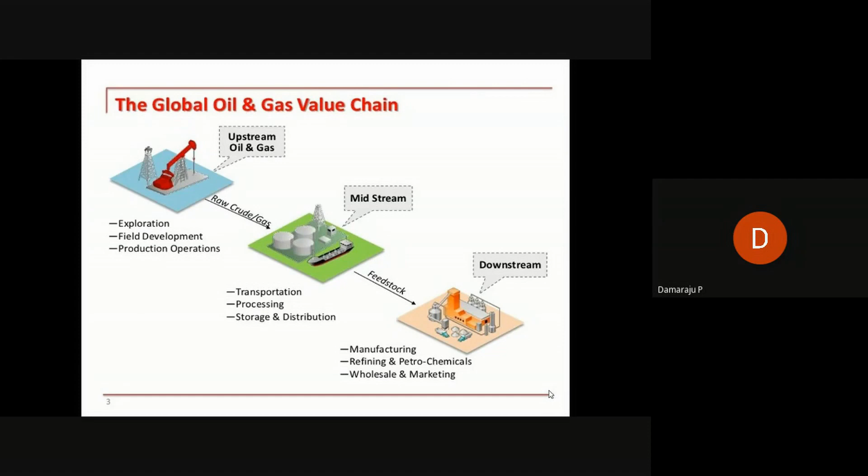That is the concept of upstream, midstream, and downstream, and we are from ONGC, and that is your upstream. That solely deals with oil and gas production, exploration, and exploitation. So you can call it production. I am going to talk about the E&P business of ONGC, basically keeping in mind ONGC oil and gas exploration and production. ONGC is an upstream industry where we find all kinds of activities of oil and gas.

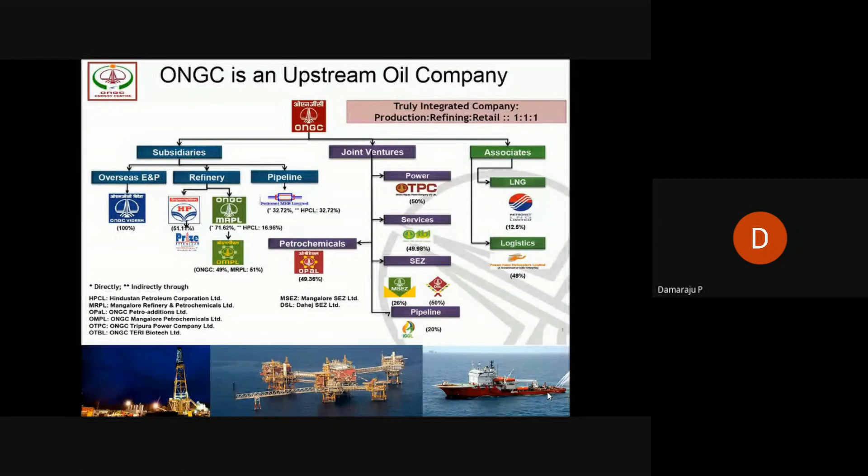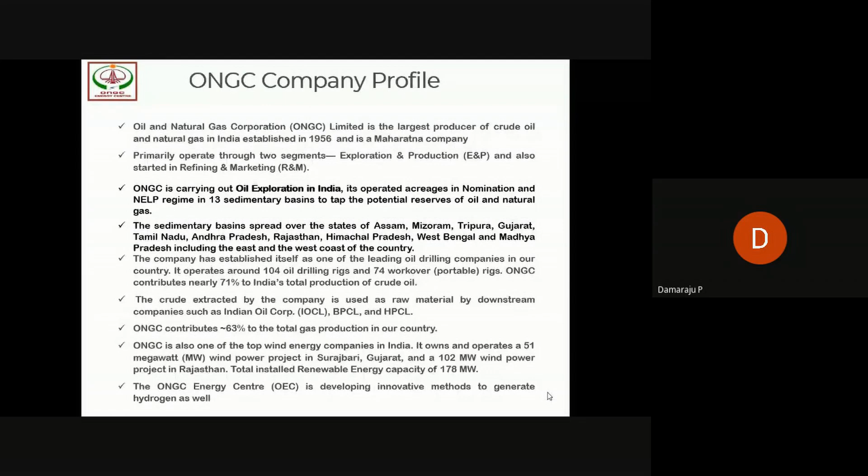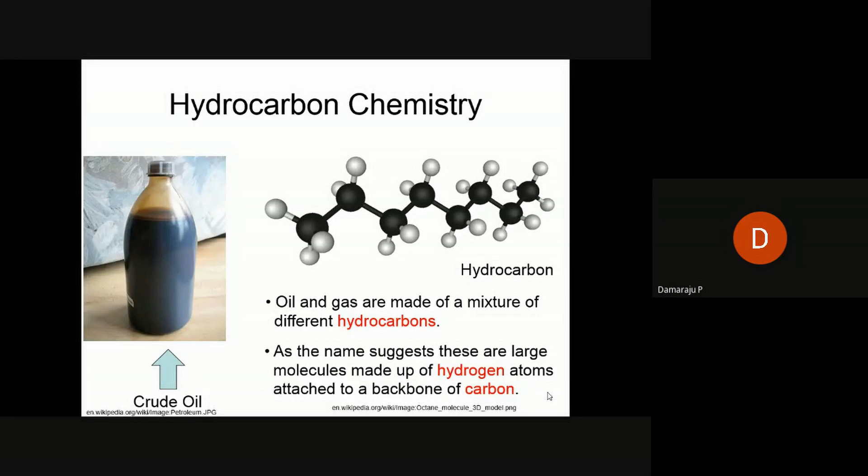As I said in the beginning, we'll start first with how oil is formed, then we will go to exploration, then development, then drilling, and then ultimately production, and then the other challenges we talk about. When we start talking about hydrocarbon, everybody knows this is made of carbon and hydrogen molecules only - larger molecules, very longer chains. And today, crude oil - it is really crude. Nobody knows what is there in that except some 20-30 products; nobody knows what the crude oil contents are even now. So this is made of hydrogen and carbon, and it is naturally synthesized.

So the origin of hydrocarbons - we call it oil and gas, we call it hydrocarbons - they are made of plant planktons or animal planktons. So they are debris, basically debris of pteridophytes, like certain kinds of plant materials, and then animal products.

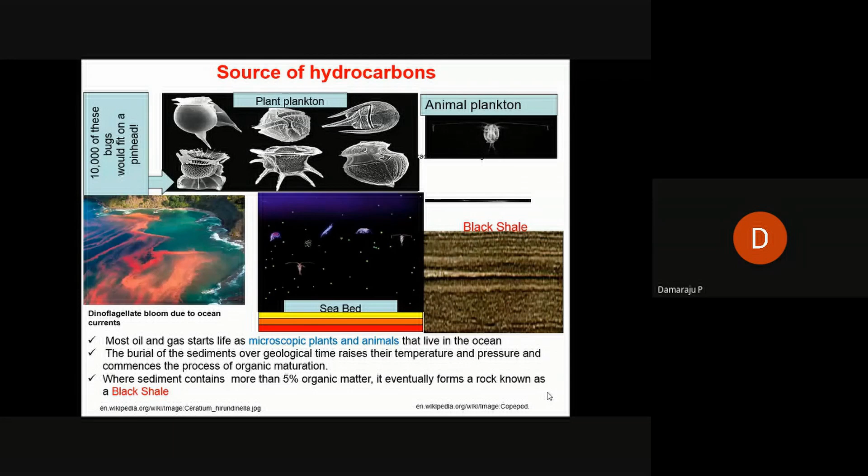And then they are all, over a period of time, millions of years ago, cooked properly. Cooked in the sense that they were submerged, just in the shallow oceans, and then ultimately they will be settling as sediments, and those sediments will become a thick shale like black shale. So that is called a seabed. They will be made as black shale.

It contains 5% of organic matter, and this is called black shale. The interesting thing about this oil and gas is it is not cooked for 1 or 2 years. 150 million years ago, the conditions were just right to make such synthesis, I should say, artificial or natural synthesis, automatically. Then these black shales are formed and piled up over a period of time, about 150 million years ago. That is Mesozoic times, in geological terms called the ancient era.

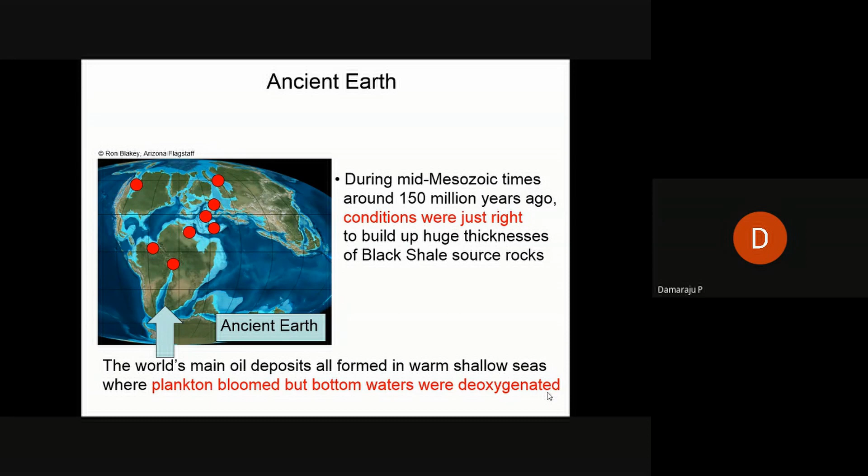So the world's main oil deposits are formed in shallow seas where plankton bloom but waters are deoxygenated. Normally offshore is the main thing. Offshore means seabed is the main thing. 60 to 70% of oil is produced offshore.

As you go down deep and deep, this black shale will be transforming into several kinds of products. This organic matter is first changed, with increasing temperature, around room temperature and going to 50 to 60 degrees centigrade, it is in kerogen form. Then it transforms further, going to 90 degrees centigrade, and at that temperature it turns to oil. That is called crude oil.

Then ultimately, when it is heated up further, automatically receiving more temperature, at 150 degrees centigrade it will be turning into gas. That is called natural gas.

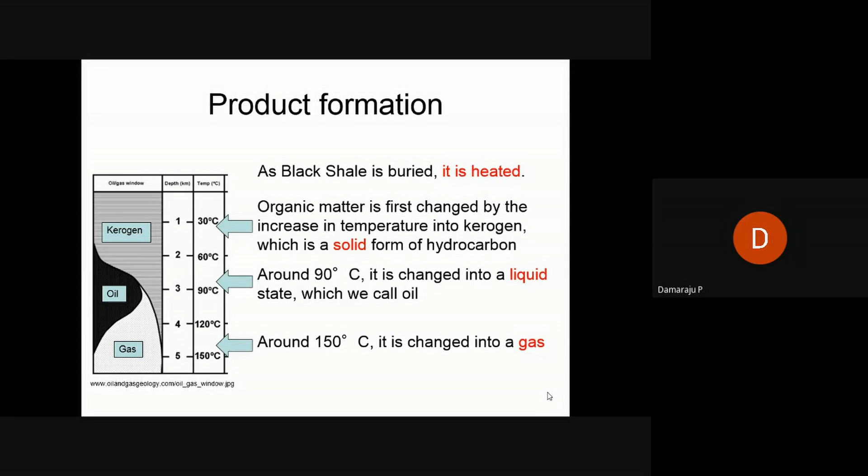Oil and gas will be less dense than water. Along with water, all three things will be existing in a particular rock beneath the surface. So that is called a reservoir. That is what we call it, the reservoir rock.

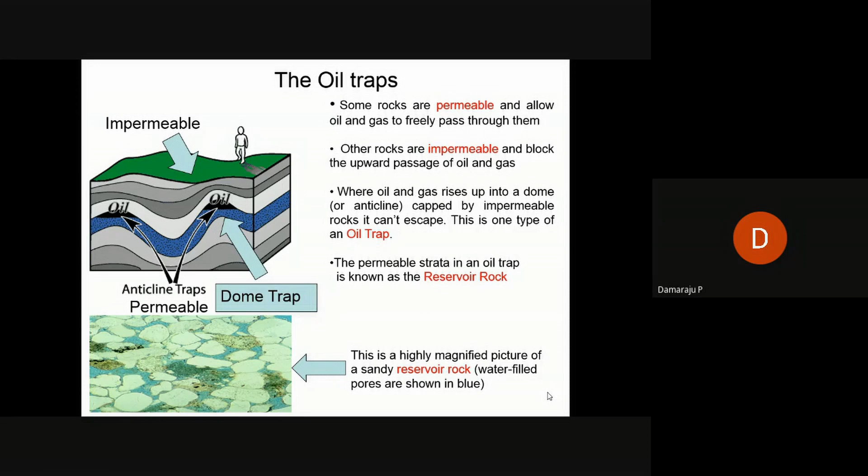So our thrust is to find out where to extract more and how much is there. When we talk about oil, gas, kerosene, black shale converting to kerosene and different types of products depending on the availability of different temperatures existing in the subsurface, they will be trapped in different types of rocks. That is called the source rock, where the pools are existing.

That source rock may be sandstone, normally largely sandstone, and it will be containing salt water and such. Normally you know, one third is only earth, two thirds is sea. So naturally, the water present in the subsurface will be mostly seawater, though it may be diluted with different types of stuff.

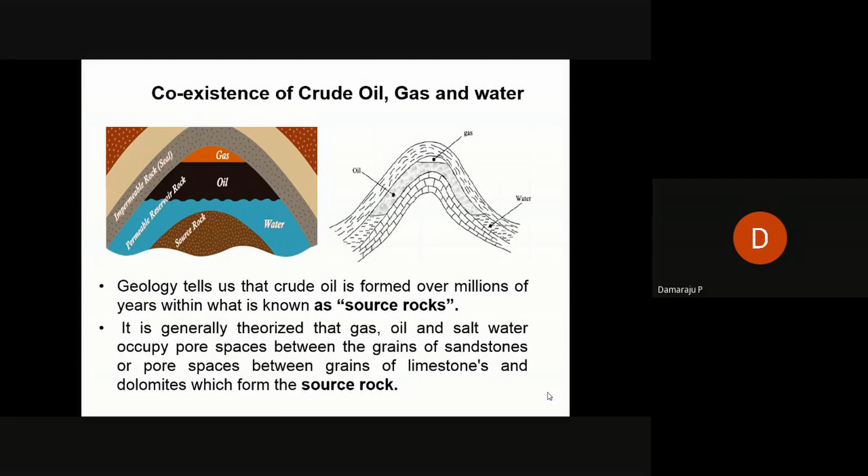So how to extract that? I know that it has migrated. I know that it is not in my hands.

Oil is produced somewhere, it migrates somewhere, and it is capped somewhere in an impermeable rock. Now my struggle is how to extract it.

So different types of campaigns will go ahead, exploratory campaigns. First, a geologist will be finding out different types of sources with different types of clues. He will study the rock characteristics, and he will know which kind of rock it is, whether it is sandstone or limestone, whether it has the capability to hold oil or not. All these initial studies are done by geological survey.

Then it will go to geophysical survey, which I will show in the next slide. It is done either onshore or offshore. Offshore means mid-sea, not on the shore. The geophysical survey is done to find out where the oil and gas pools exist, exactly where things are there.

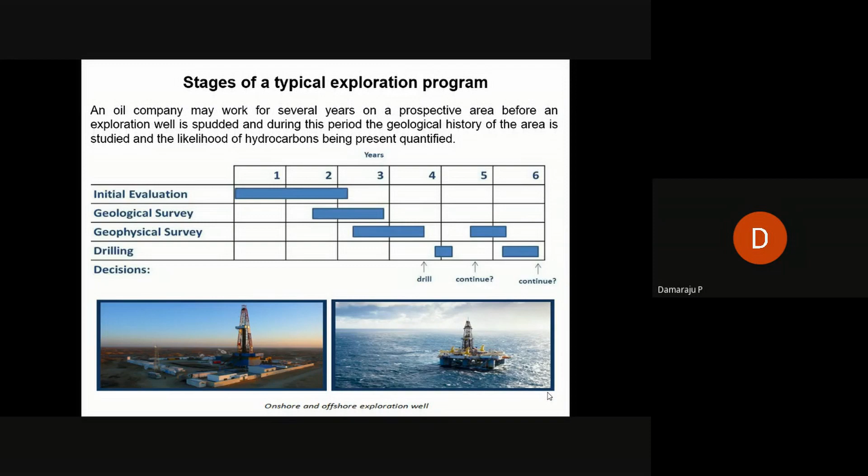Then drilling is done. All these activities taken together for drilling a well will take at least some 6 years. So by the time it comes to drilling, it is the fifth or sixth year. The initial 4 years will take these geophysical and geological surveys, re-establishing the things and then quantifying the figures, how much is there and all.

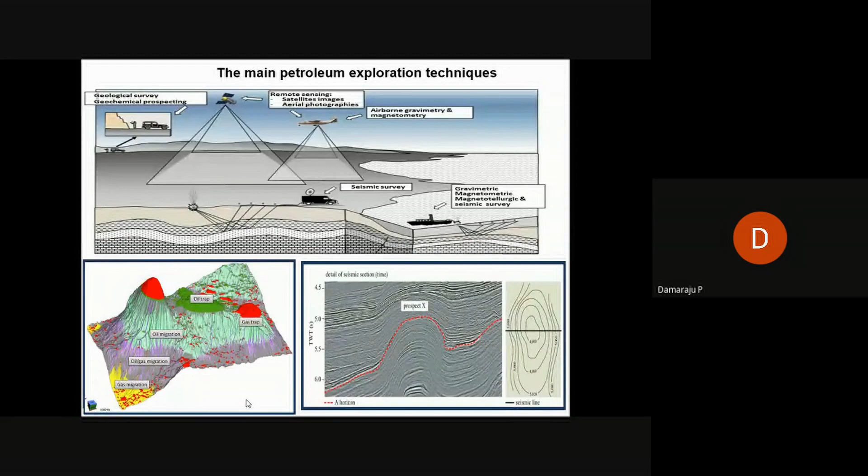So there you will pinpoint it from the seismic survey, then you will start going for oil exploration. This is the area where I want to drill. So this is the exploratory campaign seismic survey.

Different types of vessels will be used, and they will be detonating some kind of explosions, whether on land or offshore. There are devices called geophones, and that geophone will be recording the sound waves. Based on the sound wave, it will tell where the oil and gas pools exist.

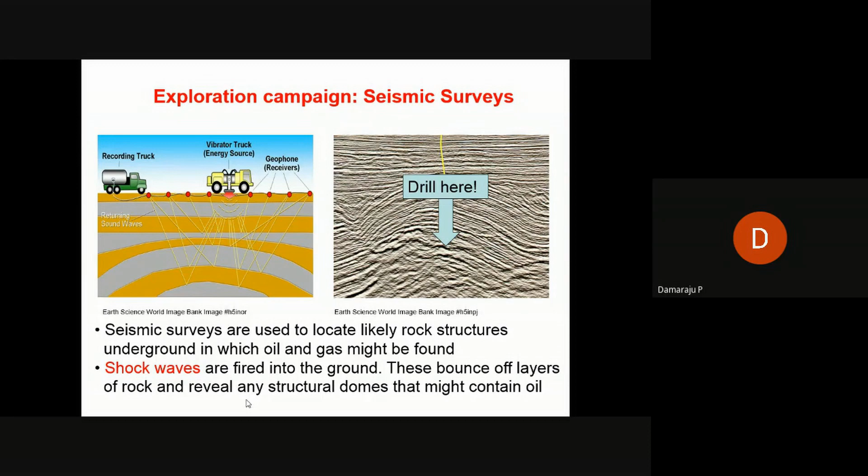Once it is pinpointed, then I will be drilling. Okay, this is my point. The right side of my slide will indicate drill here, this is the area where I have to drill. So after exploration and production, then I go for drilling. I know this is the pool where oil and gas prognosticated estimations will be taking place, so I'll say this is the area of my interest. So I'll drill a well.

This is a typical offshore rig. The cost of drilling, you can understand, becomes very costly. So 30% of the well cost is for drilling only. Each well onshore, at least shallow wells up to 1,000 meters, will take at least 1 to 2 crores. You can imagine the kind of steel and other things which are used.

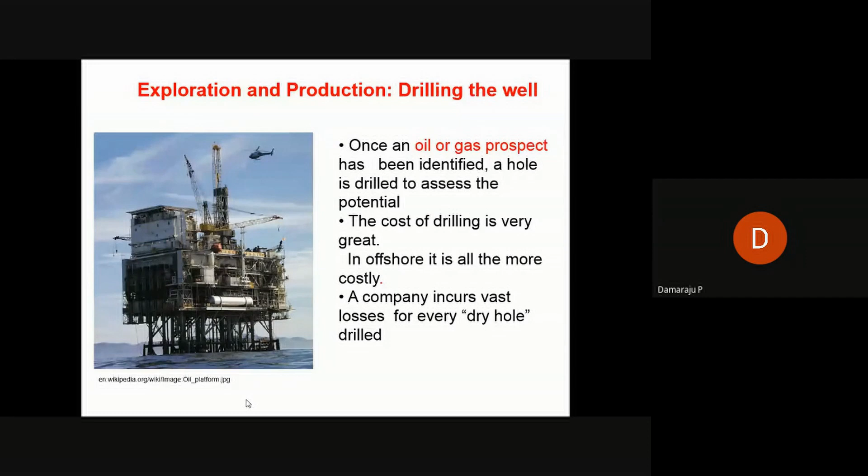If five wells are drilled and some 3 wells are producing oil and gas, then it will be economical. Fortunately, we got a very good success rate in ONGC. That's how we are surviving in Mumbai and all.

In the exploration production campaign, once the oil and gas well is drilled, it will flow on its own. Once oil and gas are produced for a long time, only up to 20 to 30% can be recovered by self flow. After some time, self flow will cease. Then you will use some kind of artificial lift systems, like sucker rod pumps as we call it. Otherwise, sometimes we use steam injection, carbon dioxide injection, or water injection to pressurize the reservoir and then produce again.

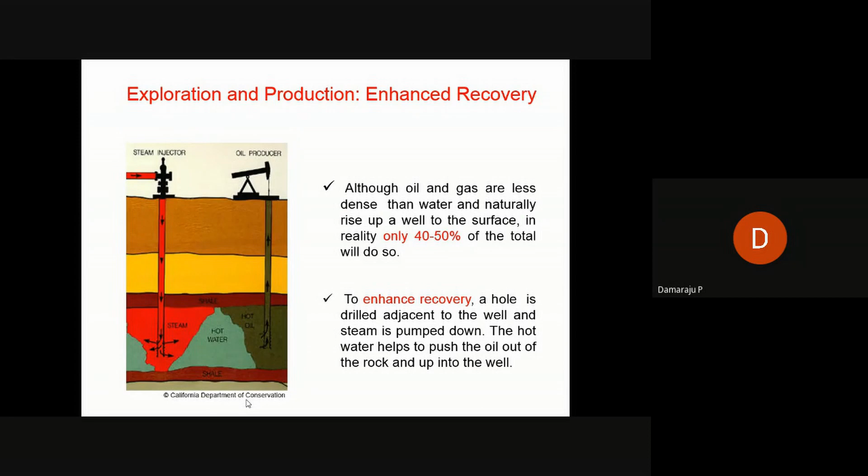In spite of 575 sedimentary basins being there, only 215 are productive. In our case also the same thing applies. We produce around 80% of India's production levels now in ONGC. So 90% of oil and gas comes from 10% of these basins. That's what I was explaining.

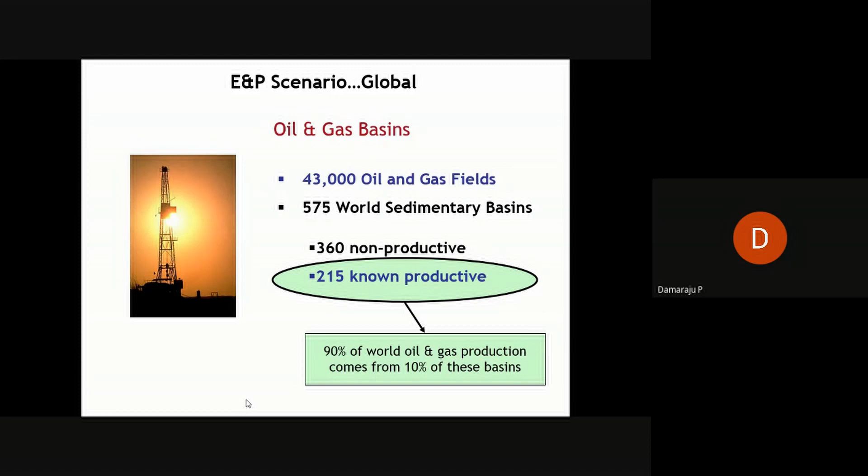So this is the scenario. World over, more than two centuries this oil and gas business has been going on. Even then, Antarctica and Arctic regions remain unexplored. These regions are still to be explored. All over the world it is present in all kinds of areas, and in certain areas it is more, and in certain areas less.

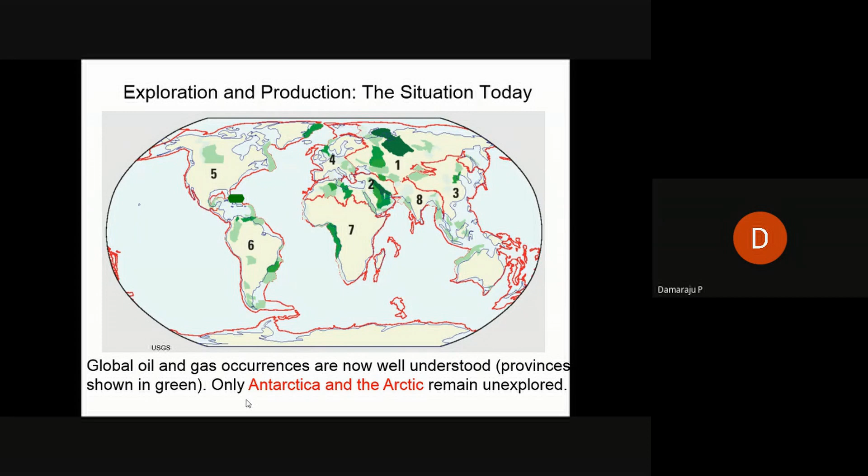You can imagine by now why certain areas are rich and certain areas are less. As I said in the beginning, the way it is formed and trapped and ultimately produced, naturally some areas will be rich and some less. So once oil and gas pools or reservoirs are identified, I can drill wells and comfortably develop the area to produce large quantities of oil and gas.

So the next step is how to produce. Obviously, any process has to meet its end user. Why am I producing it? I have to sell it to my refinery. So will the refinery accept my crude oil or gas? What are my midstream and downstream requirements? There will be some quality requirements.

I have to ensure that when transporting the products, there should be no corrosion issues, scaling issues—calcium carbonate, calcium sulfate, or mixed scales—even microbiological menace, safety and environment concerns. From Mumbai High to Uran, around 205 kilometers of subsea pipeline is laid out. So I have to consider all these aspects before treating the oil and gas.

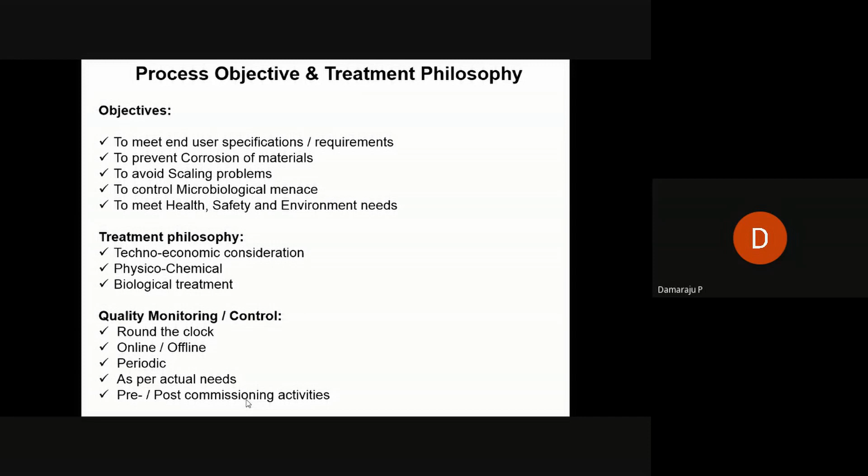So the treatment philosophy depends on whether it is techno-economically feasible, whether I can produce whatever I am producing—it's not that I'm producing it in platinum and gold. It should be producible and ultimately saleable. There's quality monitoring around the clock. That's why investments are high in this kind of business—only public sector giants use this, it's not everybody's cup of tea. This is a simple schematic.

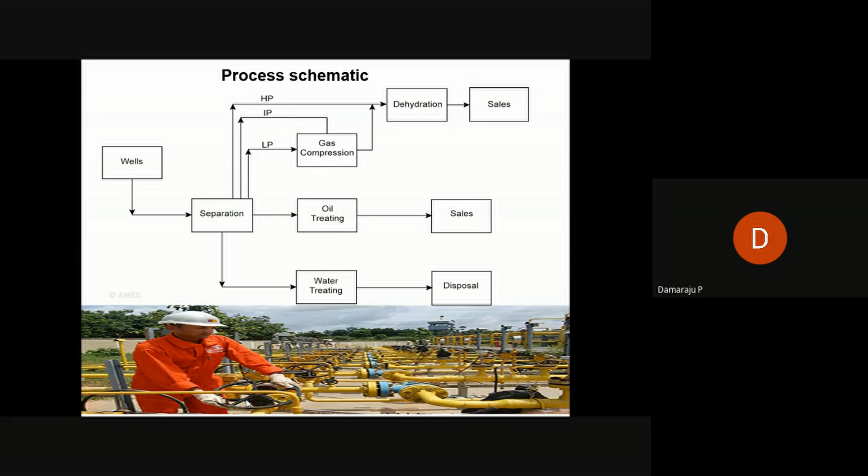What we do is drill different types of wells, clusters of wells, and they are separated—oil, gas and water are separated in high pressure or low pressure separators. Gas is compressed, distributed, and dehydrated, and oil is treated—meaning removing basic sediments and water. The water cannot be thrown out as is; it has to meet environmental norms before disposal. This is a schematic of this process.

So what is the philosophy of this entire oil and gas process? It's simple logic—a physico-chemical treatment. It's not very complicated as such, but it appears simple while actually being very complicated because of the nature of the products. Oil is not a simple product—you do not know what it truly is.

It is a mixture of several hundreds of products, and it is a three-phase phenomena. Oil, gas, and water will be there. So some emulsions and all things will be there in that. So you will be doing gravity separation. That is the best thing. That's what we do.

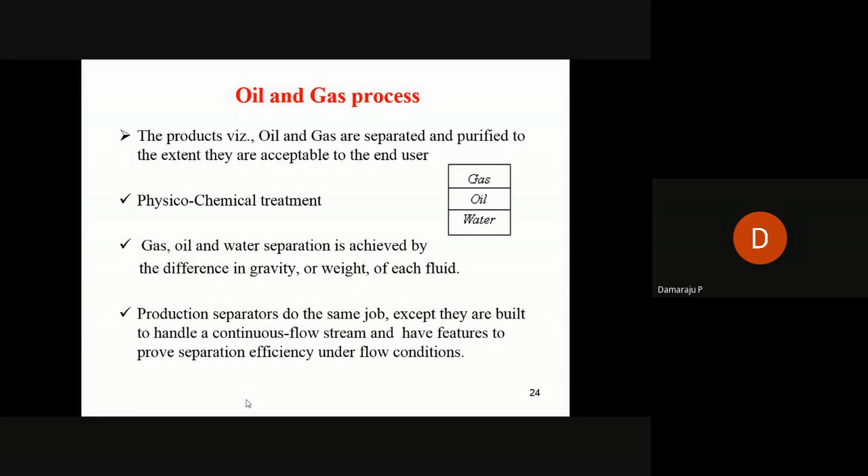When I start talking about this under certain kinds of flow, temperature and pressure conditions, how to separate it in an economical way - that is my main concern in the process. You see that the separator is the heart of the entire oil and gas process.

You will be using this in engineering actually. You will be doing a horizontal separator or a vertical separator depending on the type of fluids and type of gas that is existing. There are different types of concepts, design criteria, flow conditions, and several other things. And then spherical separators are also there.

Largely these spherical separators are used for LPG and all, where vapor pressure is more and large gas with minimum liquid is there. That kind of thing is mainly used for NGL and all. And then vertical separators are used where there is low gas pressure.

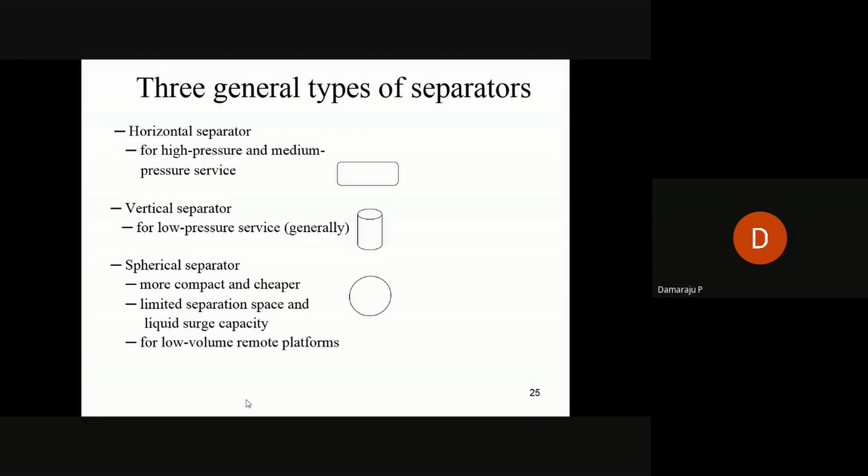Normally most of the places will be using three-phase separators because that is economical, cost effective. In the initial stages, even in Ankleshwar field and all, we used to use these vertical separators. Vertical separators are easy to clean and have several properties.

Why and how these things are used is when the flow comes, it is said that large gas space is required in this kind of vertical separator, large separator diameter - several advantages are there and several disadvantages are also there. You can go through those disadvantages, but largely we are using mostly nowadays horizontal separators only.

The fluid you can see in the right side of my slide - you will find that the liquid will be separating in the middle, that blue shade given containing some kind of droplets like oil droplets. It will give some interface, there will be a control valve which will fix, and once it reaches a certain level, it will automatically flush out. In the bottom, just below, that will be your water, because of gravity separation. I said the top will be gas, so a mist separator and several things are there.

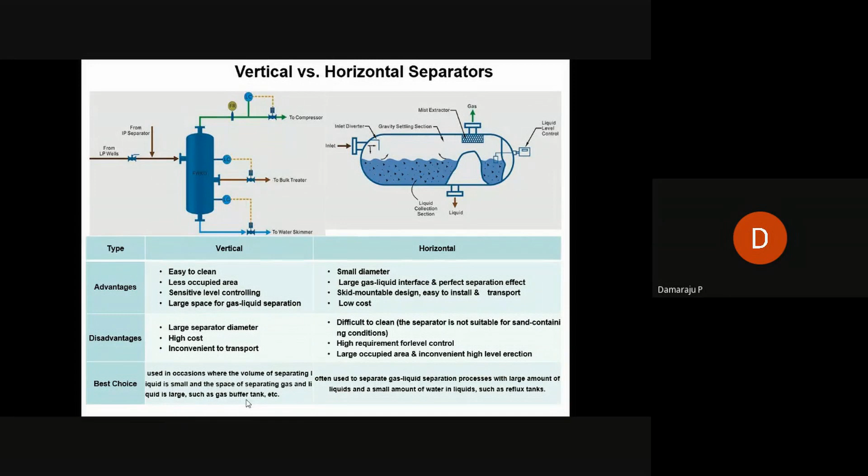So how this oil, gas and water will be separated, in the next slide I will be telling about. This is a design of the separator.

Normally when you find different types of production separators, you call a production separator a test separator. It is at the wellhead. You want to know what is the flow and whether oil and gas, water and all - how much is my flow rate, whether it is economical to produce or not. Production separator means in the process centralized platform where several wells are connected, and it will be producing oil, gas and water, further going to pipeline and all.

That is called several kinds of things in offshore - it is called a process platform like BHN, BHS, like that. In onshore, you call it CTF, central tank farm.

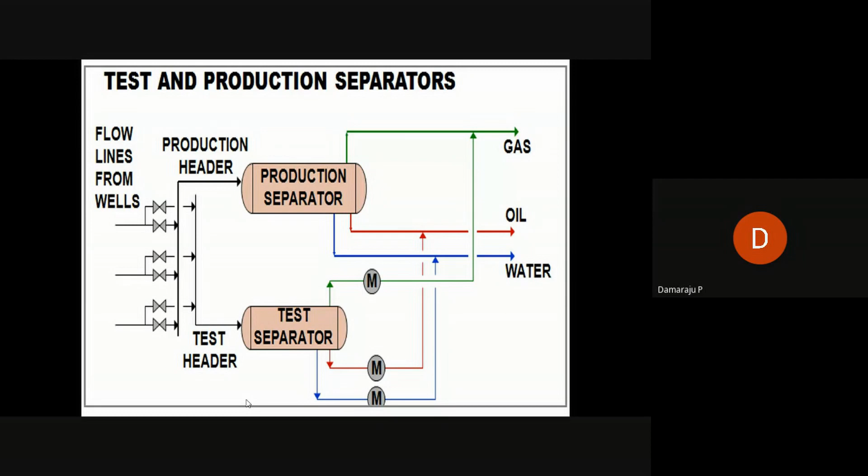This is only just we have to see. Obviously, my objective is to separate more and more rich products. So high pressure gas, high intermediate pressure gas, mid pressure or intermediate pressure gas, and low pressure gas - like that, actually 3 stages it will be separated, just like solvent extraction. You cannot do it in a single stage. So you have to recover more and more useful products.

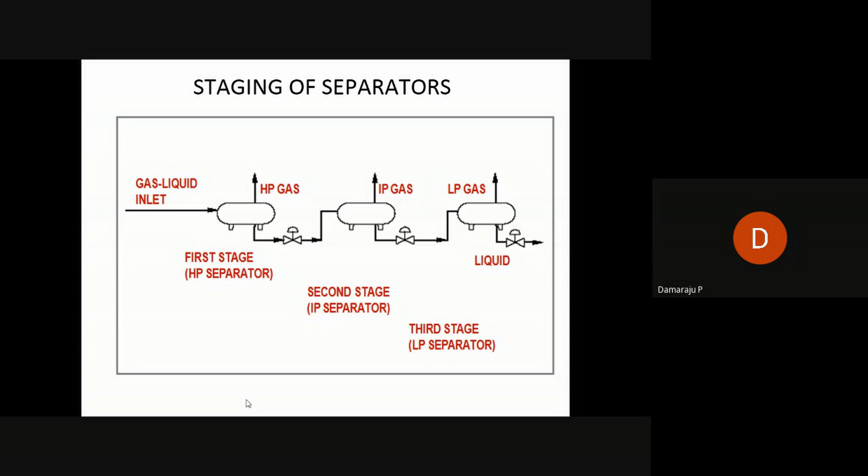High pressure gas will be the ultimate thing that will be rich with methane only - lighter components. Low pressure gas you cannot compress or anything, though nowadays you have some facilities; it is normally flared, like earlier it used to be flared. Mid pressure gas is rich with products useful for LPG and all. So oil and water - when I'm talking, you don't get pure oil, you don't get pure gas, you don't get pure water like.

So I said in the beginning itself, physicochemical separations, that chemical component plays a major role where water and oil are immiscible. Of course that is there physically, but when you are cooking at very high temperatures and high pressures, they form tough emulsions depending on the type of oil that you have. So it is very difficult to separate them under normal conditions.

So you have to add some kind of demulsifying agents and certain kinds of things, like natural products which are minerals and all, which are existing. They will be making tough emulsion. That emulsion needs to be broken into oil and water. That's my treatment philosophy.

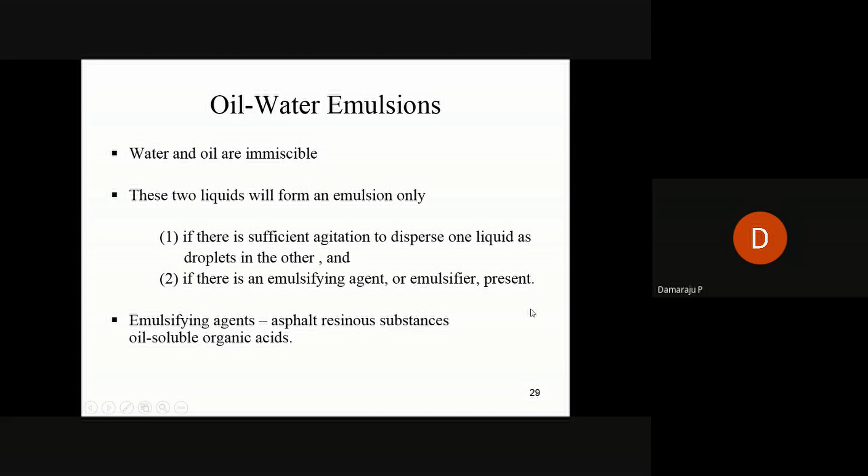Normally when we start talking about this kind of treatments, then only single treatment or single type of process will not be working. So what we do is I want to remove water. Water is a non-combustible material and it is of no value to me. But then how much water can I remove? That is my strategy to be done.

Treatment of free water is that free water will be knocked out, as I showed in the separators, in continuous process. Then I apply some heat, around 60 to 80 degrees depending on the type of emulsion. And then I'll be adding some kind of chemicals, surface active agents like demulsifier.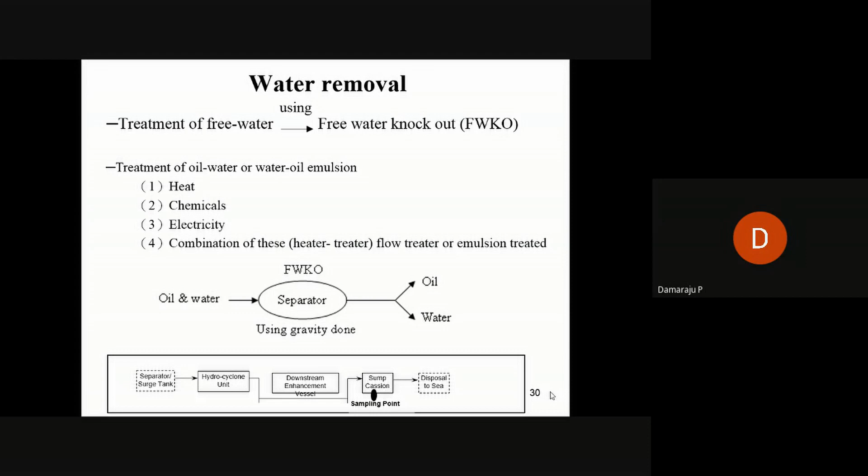This water, once it is separated out, will be going through several stages. Once again oil will be recovered, and then pure oil - pure meaning less than 0.1%, 1% oil and gas. Oil will be taken out and ultimately taken into further process for settling and all. It is only settling. You will just be breaking the emulsion in the separators.

Just let me tell you briefly about crude oil. Having said about different types of oil, gas, and water process, then what is crude oil, what is gas, what is water? Then we'll be finishing the entire story, because then you will be appreciating the type of thing. You can see that crude oil, as I told in the beginning itself, is a very complex mixture.

One barrel means around an American barrel, it's around 158 to 160 liters. So that barrel contains several useful products. Till now we have separated some of these things, like the gasoline, and you will be separating your fuel oil. These are all heavier cuts - jet fuel, petroleum, petrol, diesel, aviation fuels and all. So this is the composition of your gasoline or your fuel.

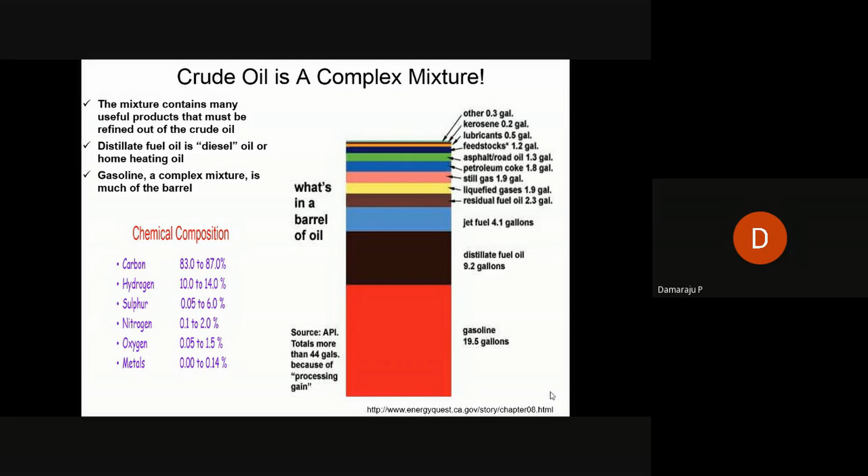Carbon is 80 to 90%, hydrogen 10%, and all remaining things are like that. That is, the carbon to hydrogen ratio is very high - that's how this is very heavy. When the carbon to hydrogen ratio is less, then it will be lighter oil or even lighter gas, like ultimately methane will be 1 to 4.

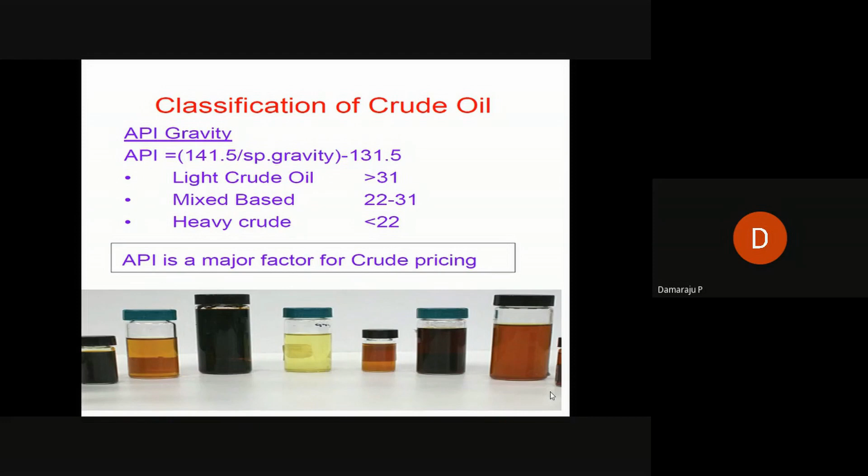So normally this entire oil trading is done based on API gravity. API means - you cannot see it, it is density only, but one cannot say density will be the factor, so you cannot remember the density. So there's a formula for this, and different types of oil you will see the colors, and these colors will tell you about what kind of light oil or condensate - very light - versus rich oil which will be dark.

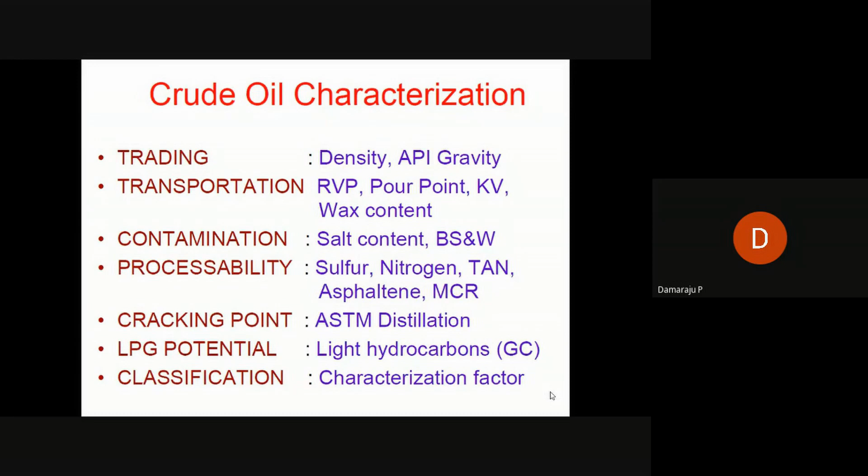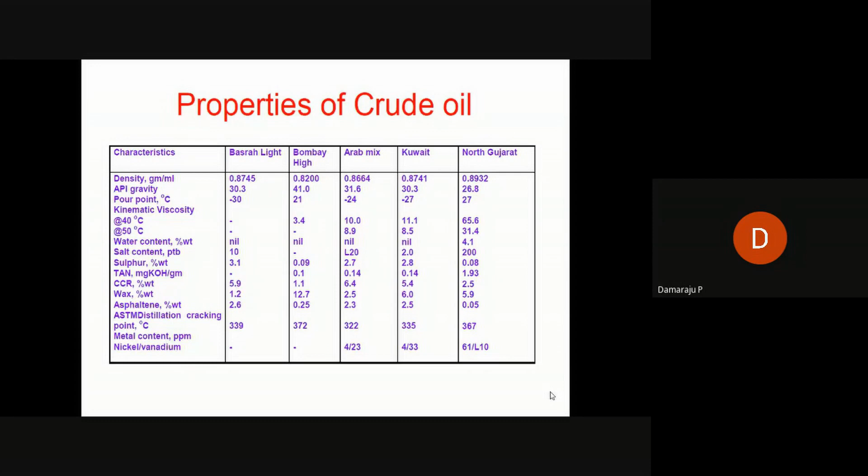It is comparable with world over crudes, like it is lighter oil. So that is what I wanted to tell. I am rushing because these slides are available with you, you can as well go through that.

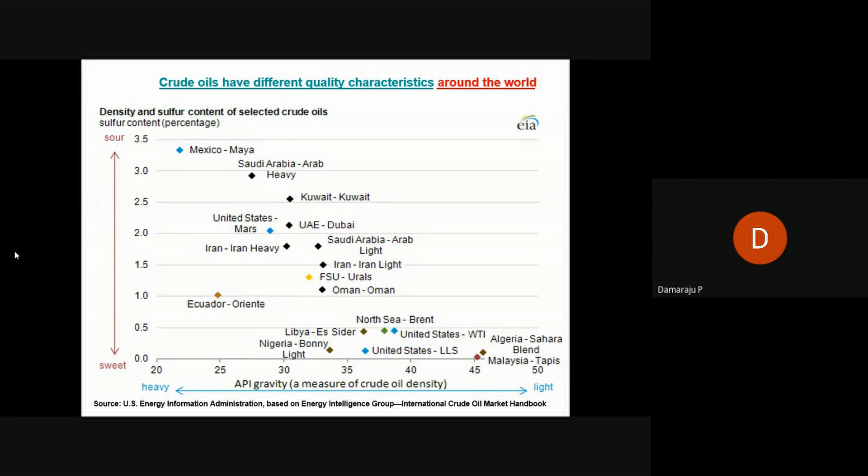When you see that there are sour oils and sweet oils: sweet oil means 0.5% sulfur content will be there, and more than 0.5% is sour oil. So far you have been producing sweet oils, that is good, and you are all over the world. Now you will be going more and more towards sour oils, so refining and all will be difficult.

Let me tell you about gas processing. What is natural gas? Natural gas contains several kinds of mixtures - C1, C2, C3, methane, ethane, propane, butane, and all kinds of things. Earlier, initially, we were not bothered about all these separations. We were just flaring everything and giving it to power generation.

But nowadays we are extracting everything. That is the reason I am telling that it is rich with 70 to 90% methane, but the remaining 10% is value-added products like C2, C3 and all - ethane, propane and all these things are separated by ONGC now, and that is what is marketed even by gas companies, GAIL also.

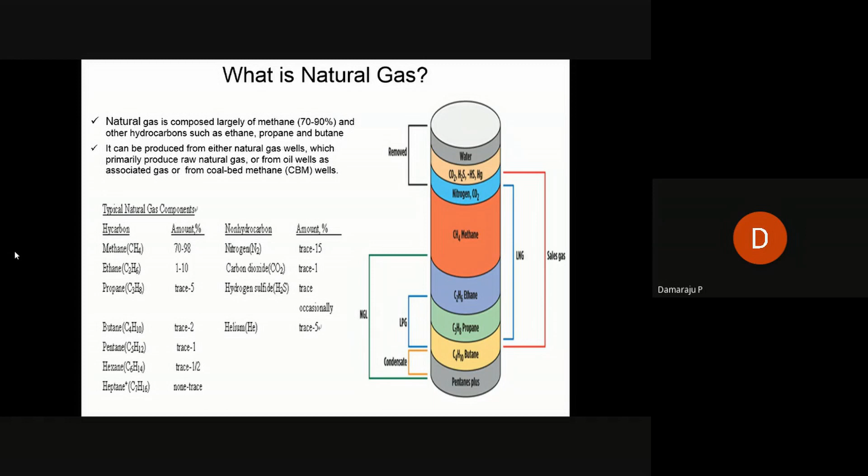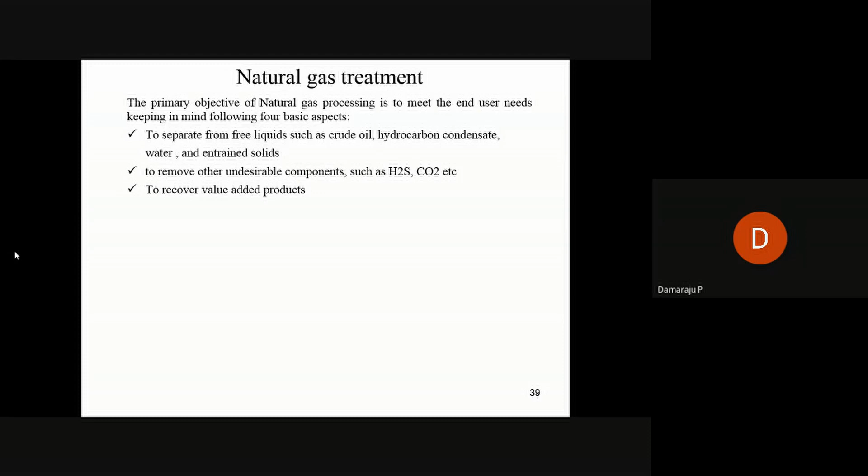So natural gas treatment - the treatment philosophy is how to remove your hydrogen sulfide, CO2, and then water. You don't add any kind of other treatments, just settling, molecular sieves and dry molecular sieves, and then this is passed through some amine solvents so that H2S and all will be removed, and this water will be completely dehydrated with some molecular sieves or even TEG, triethylene glycol.

7 pounds of water in 1 million standard cubic feet - that is the requirement for transportation in the pipeline. So different types of stages are involved, in how to remove different types of products. You can go through that; because of time constraint I am not going deep into this.

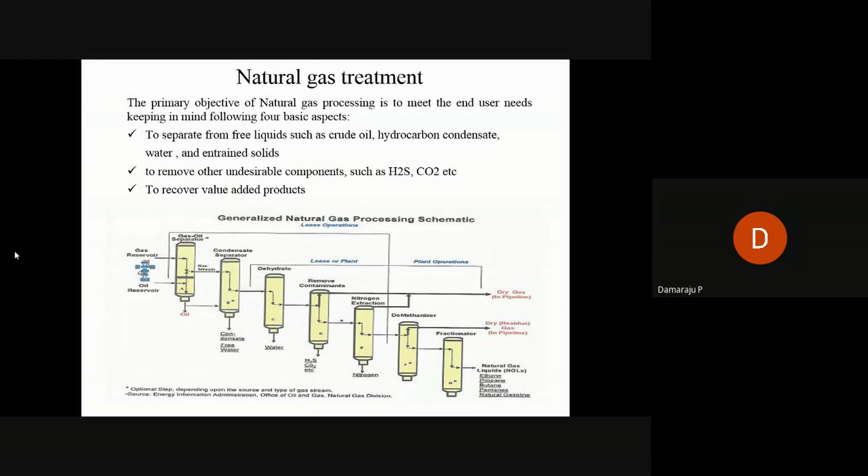As I said in the beginning, the previous slide, you can remove several products in this. So that's how this is the kind of thing - how to remove contaminants, how to make use of gas in a better way for value additions. So this is the treatment phenomena - already I said about absorption and adsorption and all these things.

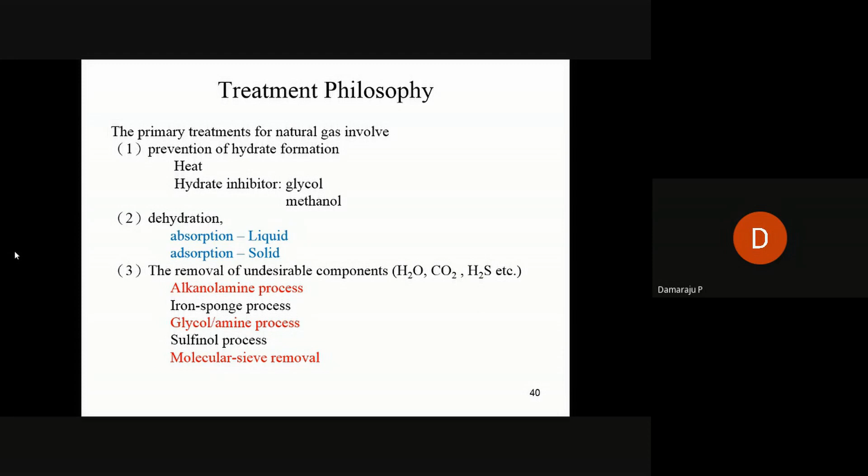So some minimum heat is applied, some 40 to 50 degrees centigrade, to prevent hydrate formation. You will be adding some kind of thermodynamic inhibitors like glycol or methanol during transportation. So gas hydrates is a major challenge - not in our case, but many places world over, actually, where the temperatures are very low.

The last but not least is produced water. In produced water - oil, gas, and water, when they are produced, water is an unwanted element. This water contains a lot of oil, non-soluble oil and organic matters like phenolics, dissolved solids, all kinds of corrosion products, or even natural clay minerals, and all these products need to be removed. Sometimes they contain geological material - they call it NORM, naturally occurring radioactive materials.

So you cannot simply dispose of them as you please. You have to follow some kind of regulatory norm. Some 40 ppm is the oil content that is allowed to be disposed of offshore, so onshore it is 10 ppm, with the remainder to be contained in different types of trace elements.

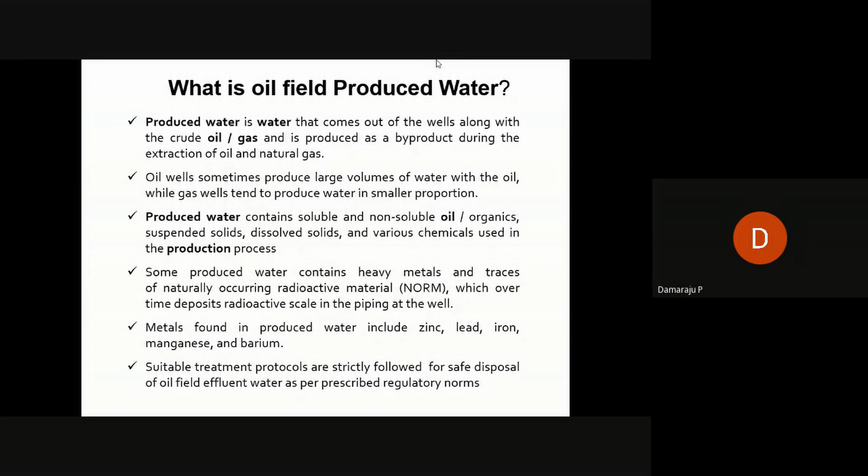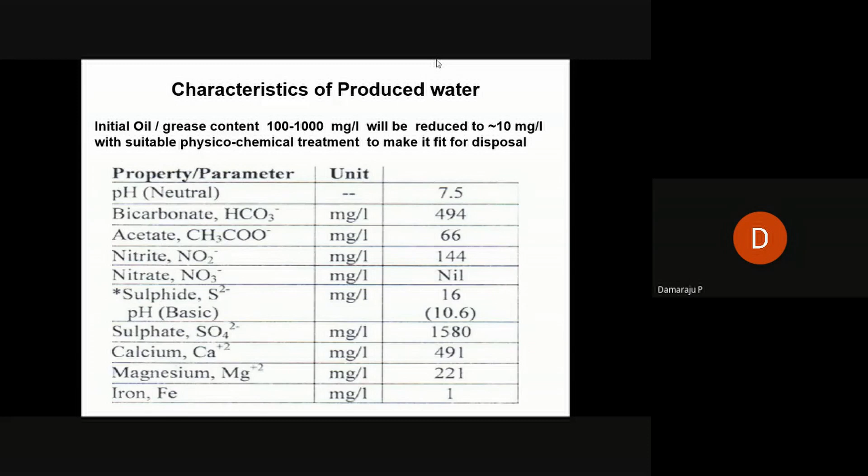You will find this is typical - salinities will be very high, and salinity is the major thing, and the remainder are your calcium, magnesium, and all. That's why the scaling tendency is more for this produced water. So you have to see that when treating this entire water, proper precautions need to be taken for disposal also, because everything will be choked otherwise.

So when I start talking about latest developments, I know that survival of the fittest is the best thing for even ONGC also.

When I am not able to produce more and more, then I have to go for unconventional sources of energy, like shale gas and gas hydrates. Those white patches you find in the globe, ice-like, that is gas hydrates. You have very good rich resources of gas reserves in gas hydrates, and exploration work is going on.

Then coal bed methane, in Jharia and Raniganj and all these areas, we are already doing some kind of work in that, either microbiological production and all. These things are going on all over the world, and even ONGC has started this for the past 10 years or so. It has been going on vigorously, and it is giving very good results now.

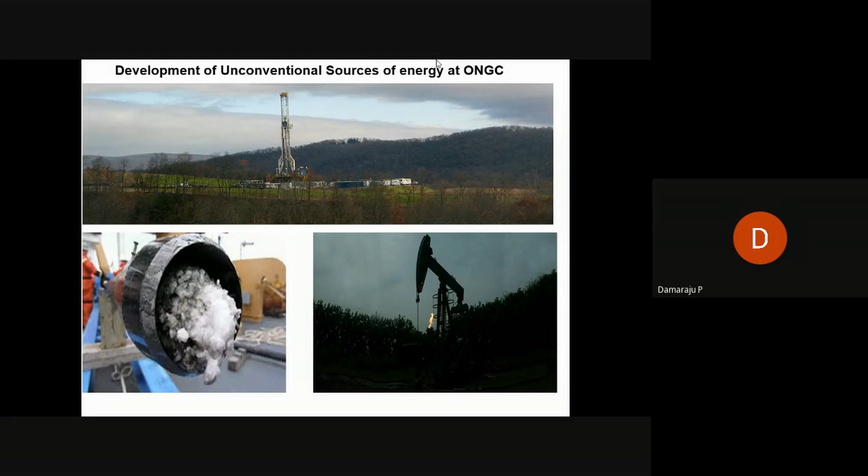You can see the Alberta tar sands, they are producing. We don't have that kind of quantities, but these tar sands in Alberta are producing very huge quantities of oil and gas. Half of the world's proven oil reserves exist in Canada's tar sands. That is what I am telling, that even for 20-30 years you have a lot of resources for this, but they are confined to certain areas only.

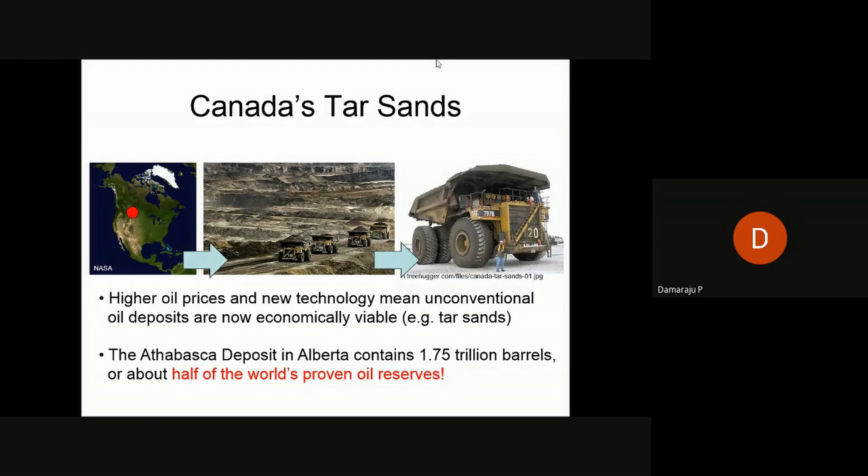So that is why they are not self-flowing like conventional sources. They are called unconventional oil deposits - shale oil, shale gas, all these things. You have to make a struggle for producing those things, and it's very costly.

So the technologies are also developing very rich, like artificial intelligence and augmented reality. Earlier we were drilling the well and then finding out what is there, but now you can visualize everything. A virtual reservoir can be seen at the desktop, and from the computer you can find out what is going on, pinpointing the source and the problems.

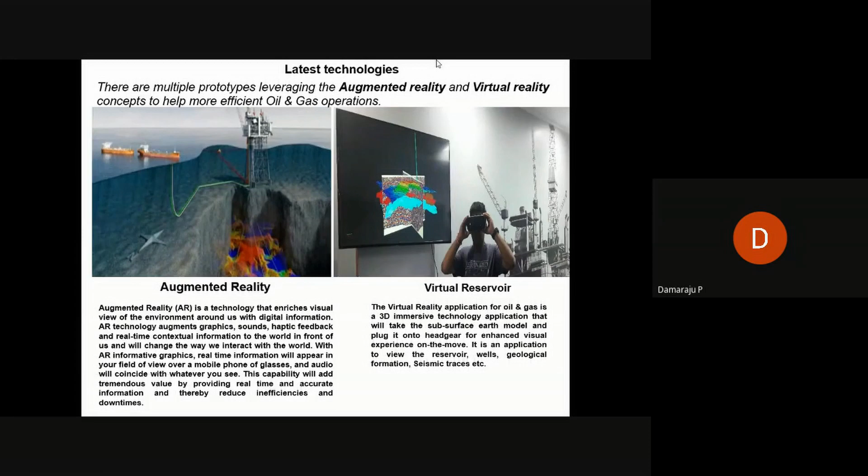Then it is done, and the efficiency of operations with digitalization and all has improved a lot, and ONGC has also introduced all kinds of things like that. The cost of operations also goes down, but simultaneously the recovery is improving nowadays.

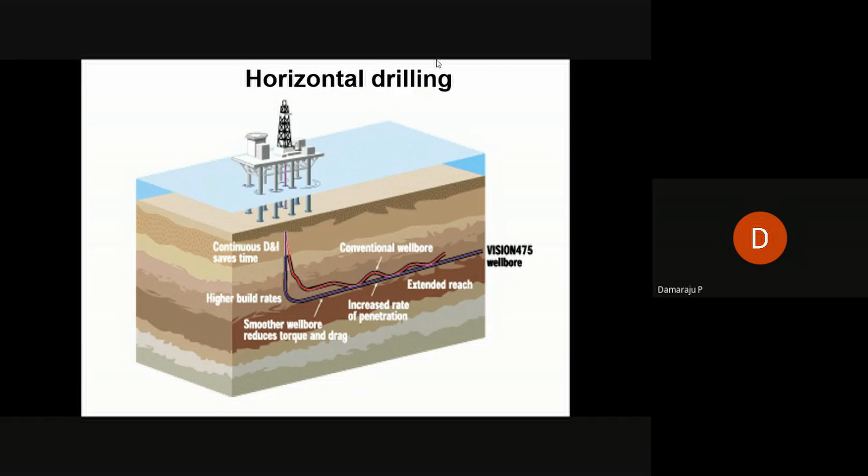So this is advanced visualization. This is one concept which was introduced in the mid-90s: horizontal drilling. Earlier we used to have a straight hole. A horizontal well will be able to sweep a lot of area nearby, and you will be producing more and more. Phenomenal production came up in ONGC history in the mid-90s when production levels increased with the horizontal drilling technique. This concept yielded very good results.

So with all these things, as I said earlier, ONGC has gone into several kinds of initiatives like underground coal gasification, gas hydrates, coal bed methane. Recently, I am working in ONGC Energy Center. We have started green hydrogen development technologies like hydrogen and all. So we are providing energy, whatever is best possible from the ONGC side, and we are doing this from upstream. We want to maintain our strategy.

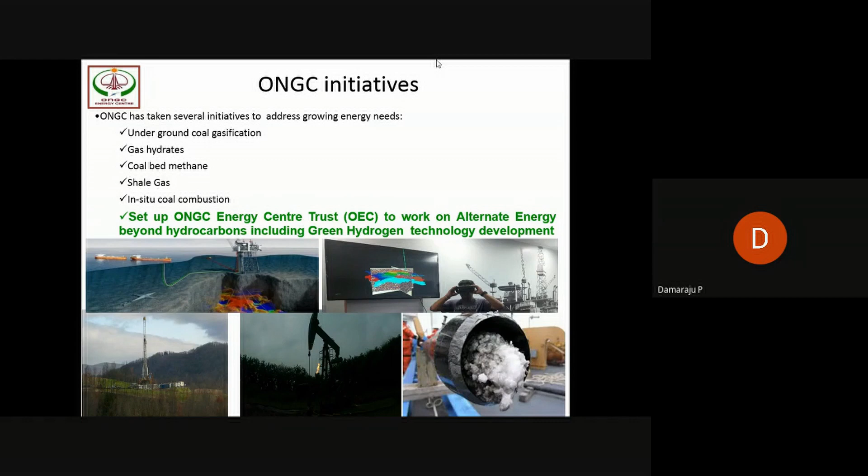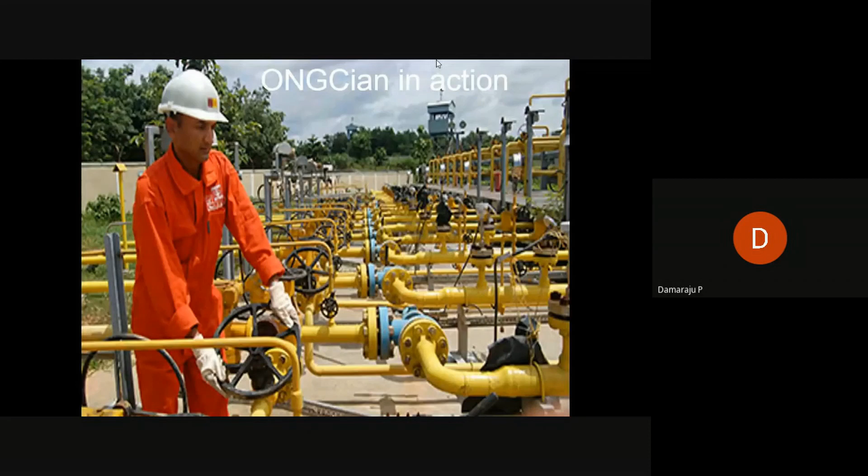So this is a GGS, where group gathering station - one of our colleagues is working there. That is how the entire operation runs, with safety operations and all precautions taken with all the safety equipment. In spite of the best measures, there will be some kind of problem, but even then, safety is given a lot of thrust in ONGC operations, not only ONGC but upstream operations in general. So this is the end of my talk.

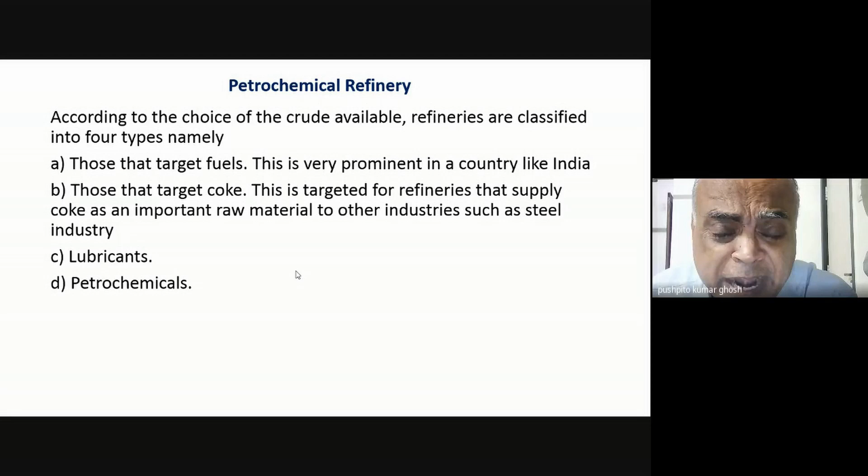Many times, the crude oil you get out will have an emulsion, and you need to break that emulsion. The people in the upstream may not be doing a perfect job of it. So one of the most important operations in a refinery is crude oil desalting. In the process, you have to remove the water and remove the salt, not just the water. Removing the salt means you need to break up that emulsion, and you may have to add some emulsion breakers, chemicals that do that job, sometimes at a high temperature. Since your crude oil might have relatively volatile fractions, you may have to carry out the desalting operation under pressure at those high temperatures to succeed in breaking up this emulsion.

One of the ICT students, Arjun Shah, about 3 years back did an internship in Reliance. He told me that in the Reliance plant, the crude oil desalter is the rate-limiting step. Everything is controlled by that, because if you cannot do that, you cannot go forward with the rest of the process. So that is how important it is.

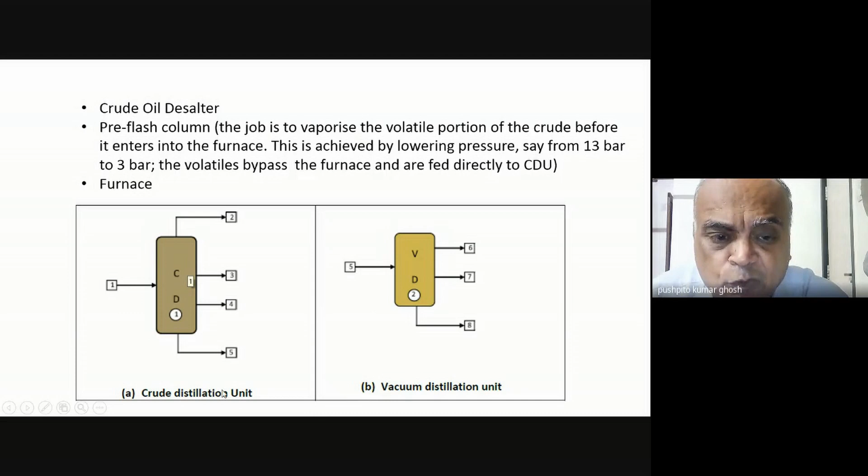This whole refinery business also requires heat. You require temperature, so many of the processes have to be carried out at high temperature. So what one does normally is take some of the crude oil and put it in a furnace where you generate heat. Even though one does separation and removes some gaseous things, volatiles will always be dissolved in the crude oil. Because of safety regulations, you may want to get rid of the very volatile stuff before it goes into the furnace. So some of the very volatiles you remove, and a part of the oil you feed into a furnace, which basically generates heat, water and CO2. The bulk of the oil, after removing some of these volatiles, goes into what is known as the crude distillation unit.

The crude distillation unit is an ambient pressure process. But adjacent to the main distillation unit, there are multiple other distillation units. They can be of all kinds, including pressure distillation units and vacuum distillation units. Like when we talked about separating nitrogen and oxygen, we were actually doing a pressure distillation at 5 bar pressure. So likewise, many of these things can also be done by pressure distillation.

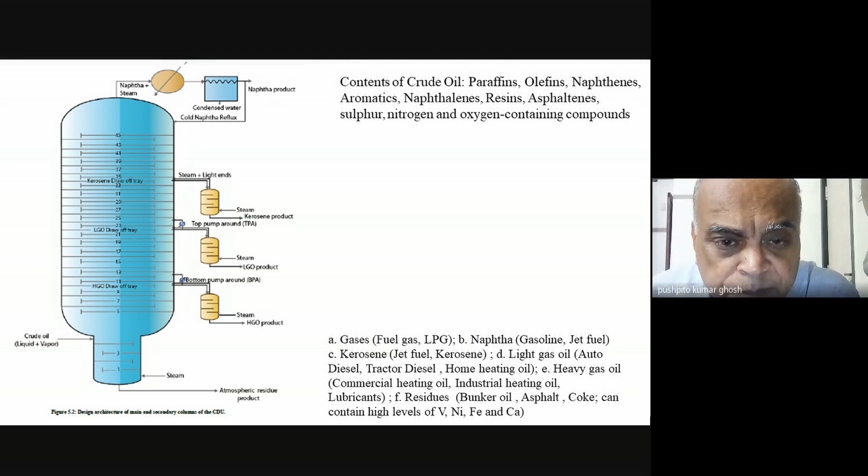Typically this is how your crude distillation unit looks like. So what's the job of a crude distillation unit? The crude distillation unit will basically fractionate the crude into some broad fractions, which will depend on their boiling point.

For example, if I have volatilized off the very highly volatile stuff, the next most volatile things are these naphthas. So I take my crude, apply steam to heat it up, and the whole thing gets heated up. The most volatile fraction will travel to the top, and I collect it as a naphtha fraction. Naphthas are typically cycloalkanes, those kinds of molecules, not very high boiling, fairly low boiling. So I take out the naphthas from here.

Then, we have always been used to, even in laboratory work, when we do distillation, we usually take out the distillate from only a single port. At the top you have a condenser, and at the end of the condenser you have an outlet from which you collect things. But that's not how distillation is done in the crude distillation unit. You will have side arms, so you are simultaneously collecting four streams from the crude distillation unit.

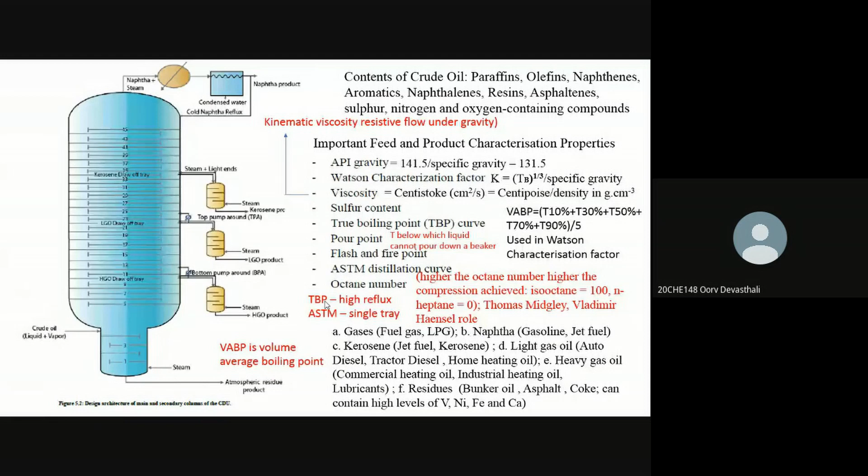You mentioned that blending of various streams is important - what does blending involve, like blending of the HGO product, the LGO product, those streams? Once you get the finer streams from each of these, you might have applications where none of the streams individually give you the desired property, but when I mix them up, blend them in a certain proportion, I might be able to get it. I'll be able to match the kind of properties required for specific applications, and that obviously requires knowledge of the downstream applications. Usually the people who practice those applications will tell you which fractions to mix with what.

Now, Dr. Parvatalu told you about the API gravity. API means the American Petroleum Institute gravity scale, and it is 141.5 divided by the specific gravity, minus 131.5. Obviously, when my specific gravity is low, my API gravity will be high. That plays a huge role in controlling the price of my crude - usually the higher the API gravity, the more the fuel will command, the more price. So people will want to know what is the API gravity. But then there's another factor known as the Watson characterization factor. The two together are sometimes used to determine the value of your crude oil.

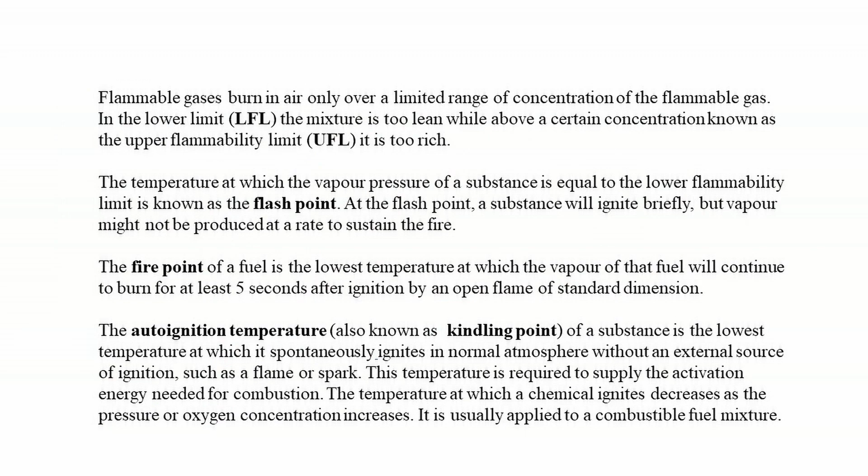Remember, petrochemicals are the source of fire. So there is a need to understand the basic definition of flammability before you do anything else. I thought I will introduce you to these terms. Many of you might already be familiar with them, so it will just be a revision.

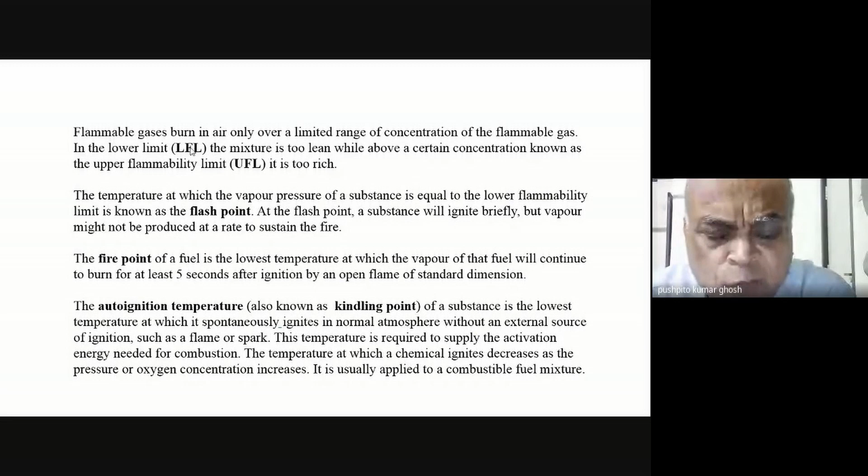Now, two very important terms regarding flammability of a gas: one is the lower flammability limit. For example, if there's too little flammable gas in the atmosphere, it won't catch fire, even if you light a matchstick. I remember going to a petrol pump, and barely 50 feet away I saw someone doing welding. I wondered, what if the whole thing catches fire? Presumably they've taken precautions and know the atmosphere there is below the lower flammability limit, so it won't catch fire.

The second is that if you have too much fuel - remember you need both fuel and oxidizer, which is oxygen, for combustion - if you only have fuel and no oxygen, then it's too rich and won't burn. It might sound strange, but you could even put a matchstick inside. Don't try it. If it's absolutely full of fuel, it shouldn't catch fire because there's no oxygen.

We all use this term, flash point. When I increase the temperature of a liquid, the vapor pressure increases. When the concentration of vapors equals the concentration at the lower flammability limit, that is the flash point of that particular fuel. Flash point is a temperature - the temperature at which you reach the LFL value.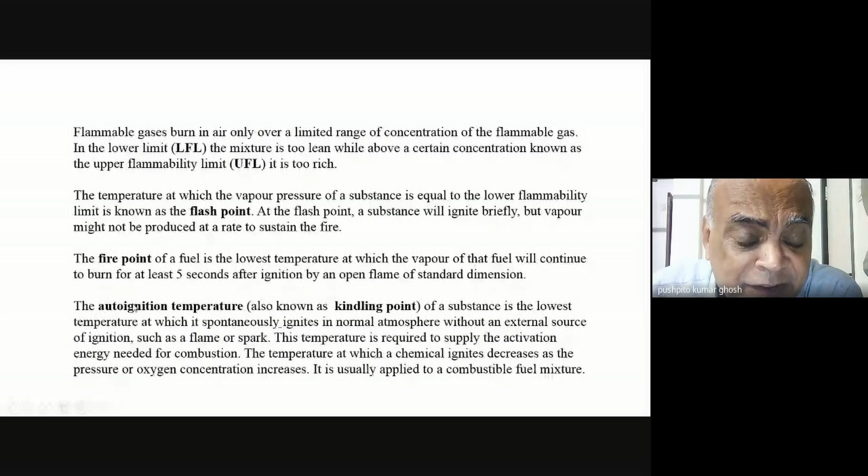Finally, there's another term: auto-ignition temperature. It's not igniting because I introduced an ignition source or a spark - it just auto-ignites because of its high temperature. It's also known as the kindling point.

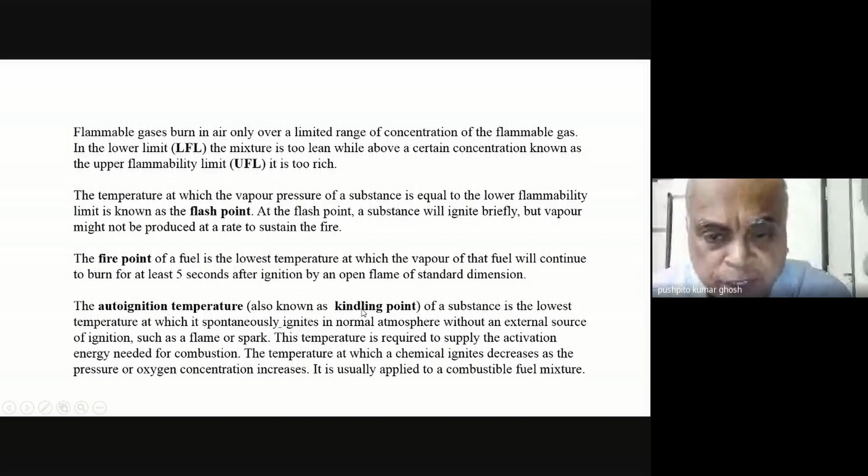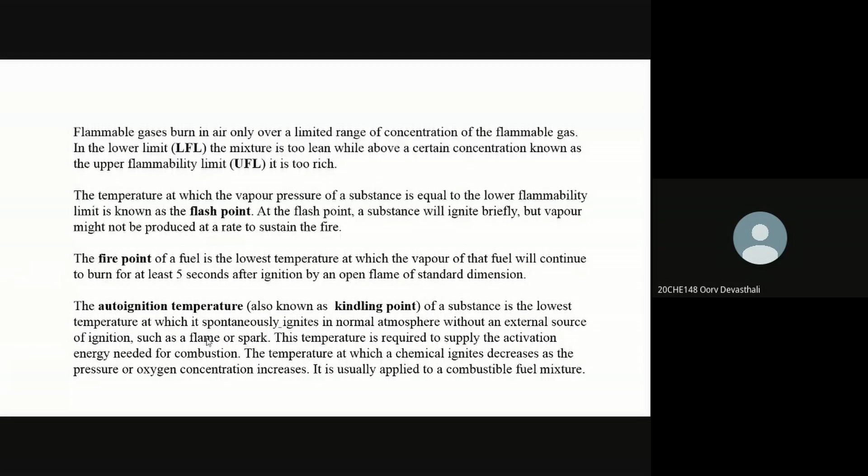A student asks: regarding the UFL, the slide said that beyond the UFL the gas becomes too rich - what does that exactly mean? The instructor clarifies: beyond that point, you have insufficient oxygen.

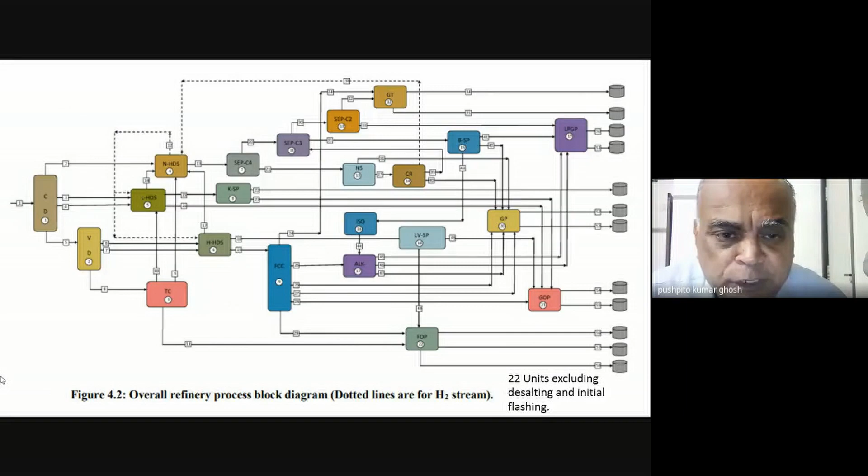This finally is what a refinery looks like. Taking all the operations - vacuum distillation, fractional distillation - this is the separation part. After that comes downstream processing: organic reactions like alkylation, hydrodesulfurization, hydrodenitrogenation to remove sulfur and nitrogen. Then you get purer fractions, and finally you blend things. There are a wide variety of different operations going on.

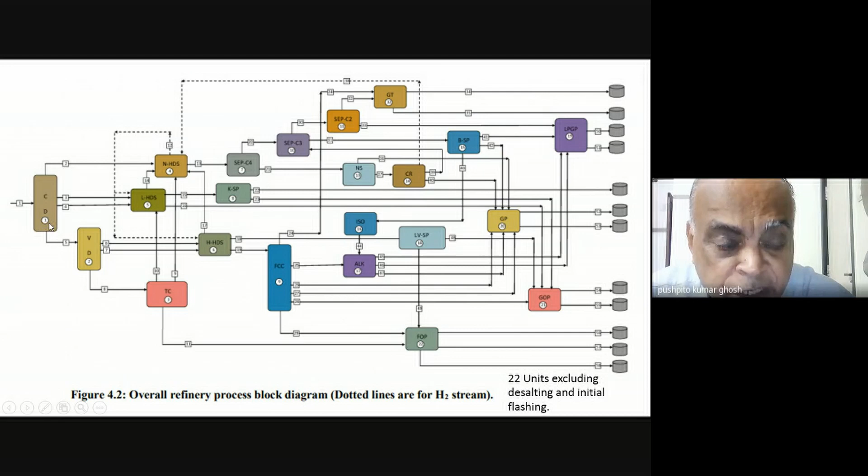Altogether, if I remove desalting and flashing - the initial steps to remove water and salt, and also to get rid of very volatile stuff - and start from the crude distillation unit, there are 22 units altogether. Let us now see what those 22 units are.

You've seen the crude distillation unit. If there are things I can pull out with vacuum, I'll do a vacuum distillation. If I want to make more petrol and diesel - lighter fractions - I have to crack heavier molecules, that's called thermal cracking. Cracking can also be catalytic cracking.

These units are vitally important in a petrochemical refinery. Then I've got my hydrotreaters. Let's say I have compounds like thiophene present in my crude oil, and I need to remove it. How do I remove it? I do a hydro desulfurization and produce H2S. Remember, all the sulfur for sulfuric acid comes from these hydrotreating units. And all hydrotreating means I have to apply hydrogen. So a refinery needs a lot of hydrogen.

Then I've got separators. I've got solid, liquid, and gas, and I have to separate them out. And the splitters, where I have a liquid fraction and I'm splitting it by distillation into lighter and heavier fractions. Reforming, as I told you, could be isomerization. That's reforming. I may do alkylation, since I may need alkylated products. And when I did hydrotreating to remove my H2S, NH3, etc., those have got to be treated - you cannot just let them out. So that is gas treating, which I have to do.

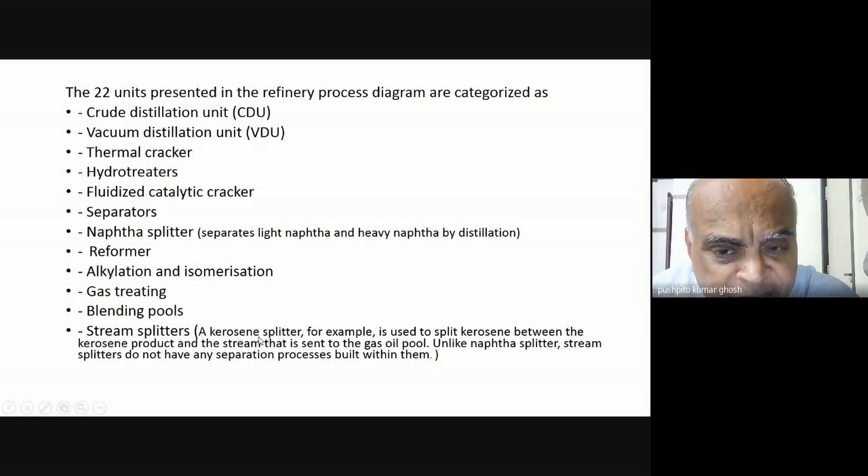And then I've got my blending pools, where I blend various fractions to get the right desired property for specific applications. Only in the case of the naphtha splitter is it a true splitter, in the sense that I'm actually doing a distillation, a fractional distillation. But they also have other splitters, like a kerosene splitter. What this splitter means is that I'm not doing any separation - I'm just deciding, if I've got say 10 tons, how much kerosene I need for one application, how much for another, how much for a third, and I'm just splitting it by weight. So that is what is meant by stream splitters - they're just splitting it into different streams, but I'm not doing any separation. Only the naphtha splitter does a true separation.

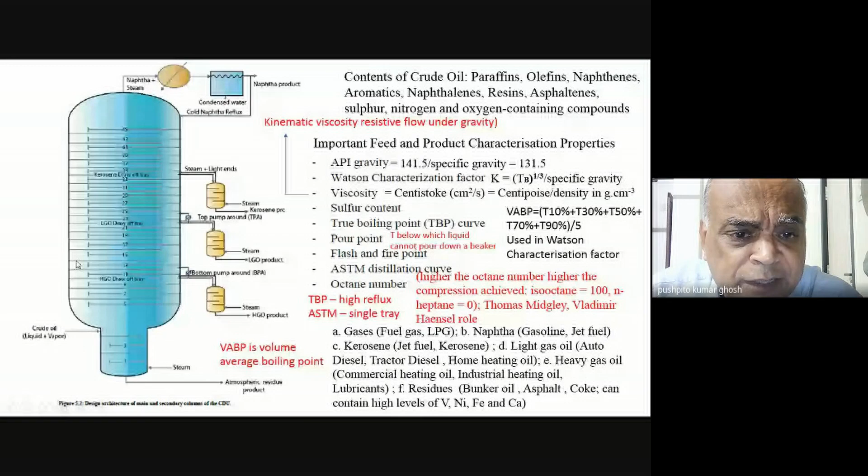Then I've got the treating block. The treating block would be the desalting unit, as we discussed, because I have to remove the salts, or remove sulfur if there's thiophene, or if I've got some pyrrole fractions or amines like pyridine, I have to remove those. So that's all part of hydrotreating, and I have to do that with hydrogen. And what will I end up with? I'll end up with things like H2S, ammonia, etc., which then I have to take care of.

Then I've got a reactive transformation block. This is where I'm doing chemistry - meaning cracking, which could be thermal cracking or catalytic cracking, breaking up larger molecules into smaller molecules. I may be alkylating, isomerizing, and reforming. Reforming is quite the same as isomerization, not so different, but it's also like, for example, converting methane into syngas - that's also reforming. Then I've got a 4th block, which is just physical operations like blending, kerosene splitting into ratio and proportion, and butane splitting, doing much the same thing. So out of the 22 operations, I can break them up and classify them neatly into these 4 blocks.

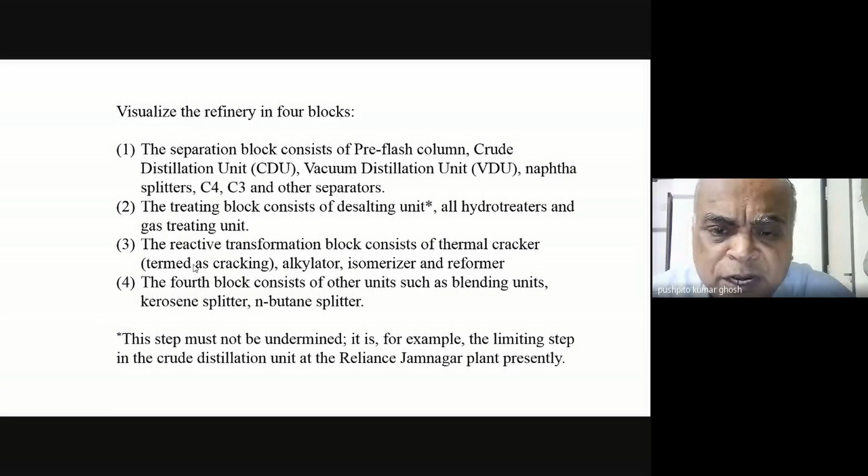Then you need experts for each of these units, and broadly again for the broad separation areas, etc. So you'll have super specialists, then some who are specialists in the broad area of separation. So the kind of specialization you do in chemical engineering, you might find you will be especially useful for one part of the operations compared to another, and people might get trained accordingly.

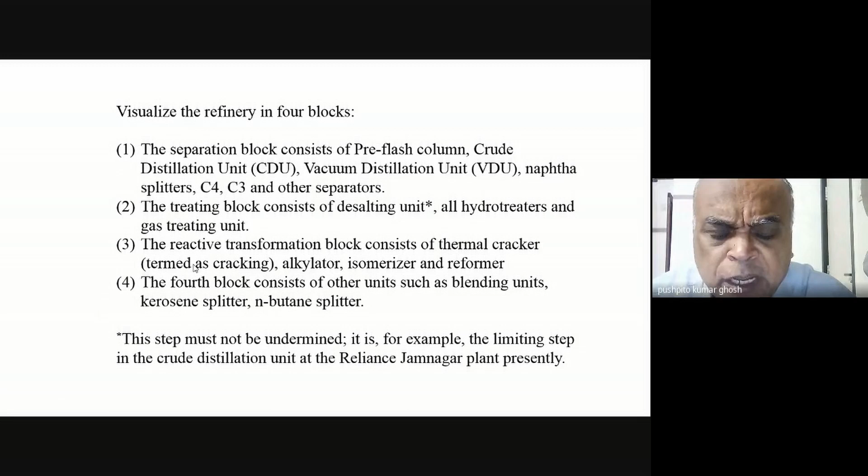Is it all clear to everyone? Yes, sir. Understood the process well? Yes, sir. Okay, I'm so happy.